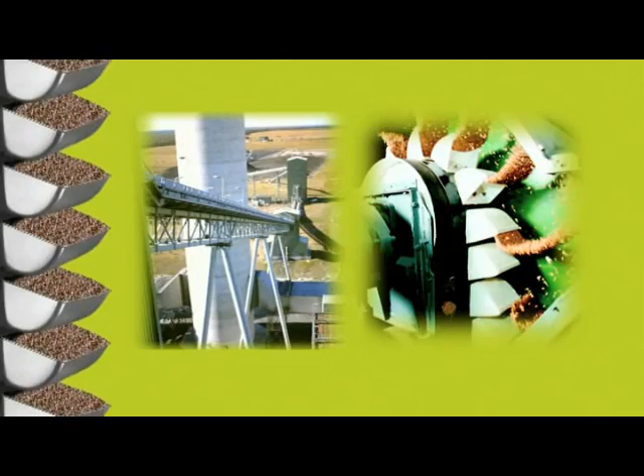The 4B Group specialises in providing engineering expertise and supplying components to the engineering industry in process plant, material handling, everything from the farm through to the grain terminal, from breweries, cement works, feed mills, both agricultural and industrial process plant. Our main lines of components are connected with the bucket elevator and the conveyors within process plant, which are the heart of those facilities. Our basis has always been engineering, and our expertise is in providing the customers with engineering solutions.

The company began exporting in the early 1970s, and we've progressed to a state now where we have 6 of our own subsidiaries based in countries across the world. Our subsidiary companies are based in the USA, in Argentina, in France, in Germany, in Thailand, and most recently we've opened an office in South Africa. We also sell through distributors, exclusive distributors in many countries, whom we regard essentially as our partners.

The company is an engineering company rather than a sales and distribution company. We believe that we are engineers selling to engineers. We employ specialist engineers with huge experience in the process industries. We employ here more engineers within the group than we do sales or support staff. Many of our engineers have been with us for a long period of time. What keeps them in the company and excites them on a daily basis is the challenge of finding solutions to customer problems within the process industry.

The focus of the company has always been to provide technological solutions to our customers' problems, and much of our product range has been developed by and through discussions with the end user upwards, rather than solutions created by ourselves and driven down. In many cases, we've developed products specifically for an end user customer and then developed those into a product that we can sell globally, because with the benefit of the experience of that large end user, that experience in resolving that problem clearly has other applications across the whole industry.

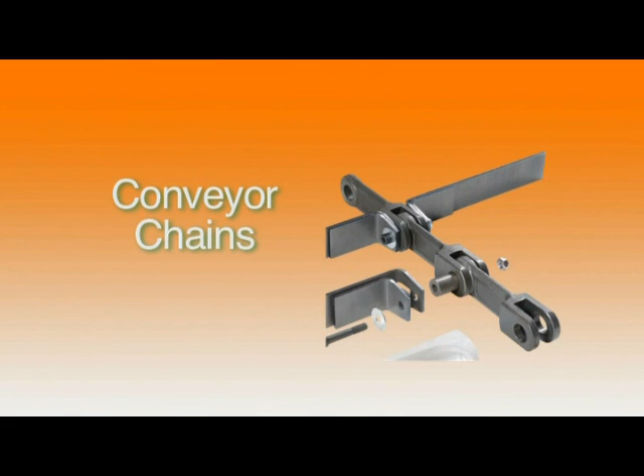The company was originally known essentially for being a manufacturer of elevator buckets, and over the years we added to that a range of other components which we found that our customers wanted to buy as a package at the same time as they bought their elevator buckets. For example, elevator belting, elevator bolts, belt joints, and then on into providing conveyor chain, really focusing on what are the guts of a process plant, the bucket elevator and the chain conveyor, which are really central to operation in that industry.

An increasingly important part of our business is in providing preventative maintenance systems for process plants. We began many years ago producing sensors, and that's now developed into producing complete systems to try and minimize the inherent risk of grain dust explosions within process plant. The effect of such explosions can be absolutely devastating in terms of the downtime that's caused, and of course ultimately may result in injury or death of employees.

Over the last 30 years, the problem of grain dust explosion is not new, but over the last 30 years there's been increasing focus from health and safety in a number of countries in trying to reduce the annual incidence of these explosions. Although there's been growing recognition of the inherent risks in process plant, unfortunately there's a whole raft of different laboratory tests unique to each country. For example, CSA for Canada, FM for the United States, the ATEX standard for Europe, the IEC EX standard, which is in theory going to become the international standard but has not yet been accepted by many countries across the globe.

One of our strengths is that we have invested very heavily in ensuring that our equipment has gone through the independent laboratory tests and been approved by all of these national or international standards, and we can provide certification to back that up. The great advantage this offers to the OEM, the constructor, going in to build a process plant, is that we can offer to him a common model of one of our sensors or systems which has been approved for the country where he's quoting or building an installation.

The developments in electronics move forward at an enormous pace, and the challenge for us as a company, as the market leader in the field of preventative maintenance and monitoring equipment, is to stay ahead of the field by continuing to invest both in research and development and in the people that we employ.